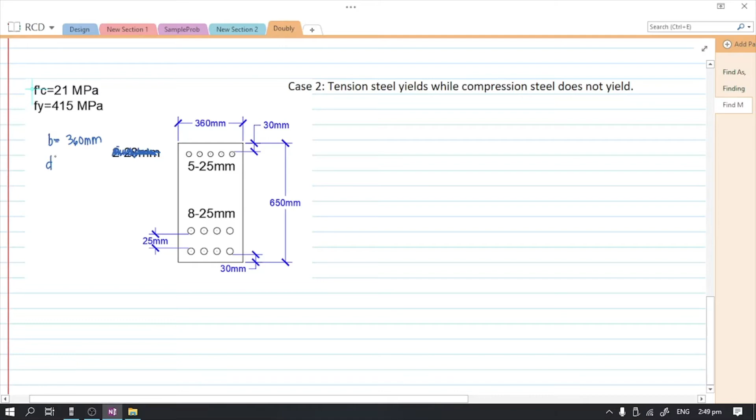Again, ang D prime dapat measured siya from the centroid of the compression steel reinforcement up to the extreme concrete fiber. So dito we have 30 plus kalahati nung bar diameter na 25 mm. So this is equal to 42.5 mm.

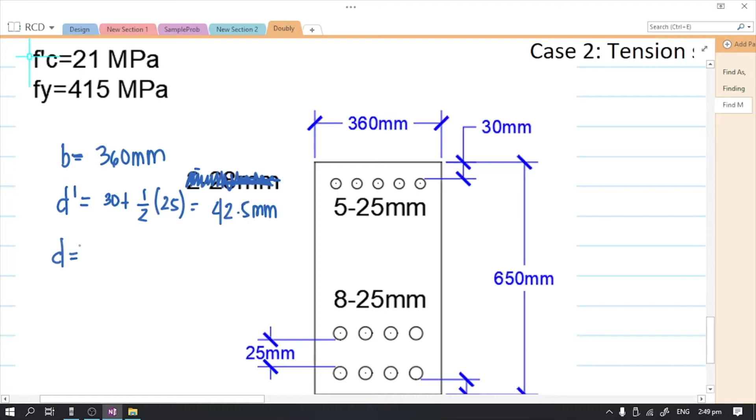And then ano ba yung magiging effective depth natin? So this is a special case kasi nga dalawa yung layer natin. So ang i-assume natin dito, mag-a-act sila as one. Since equal naman yung area sa unang first layer to second layer, so pwede nating i-assume na nasa gitna nila yung kabuang tension force natin.

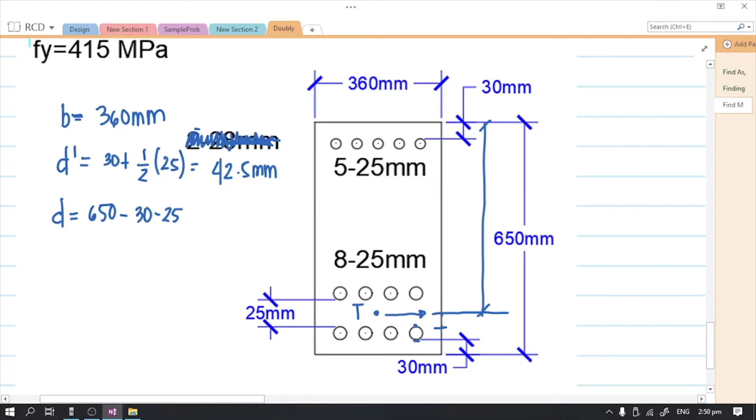So ano ba yung magiging sukat nito? Kung isosolve natin yung effective depth, we have 650 minus 30, minus 25, and paano makarating dun sa up to this one? Kalahati nung ito, 25 mm. So this value is equivalent to 582.5 mm.

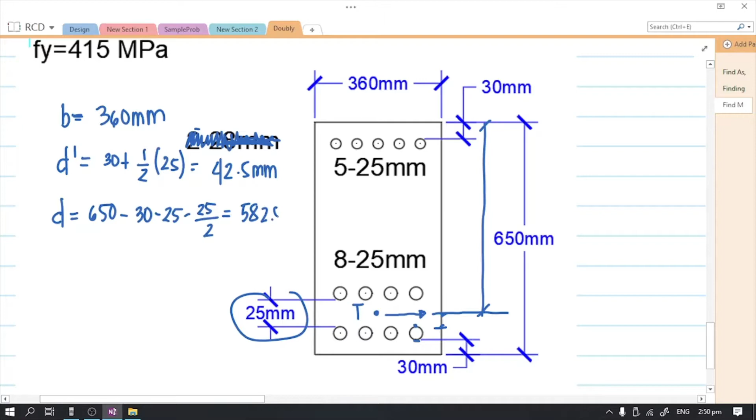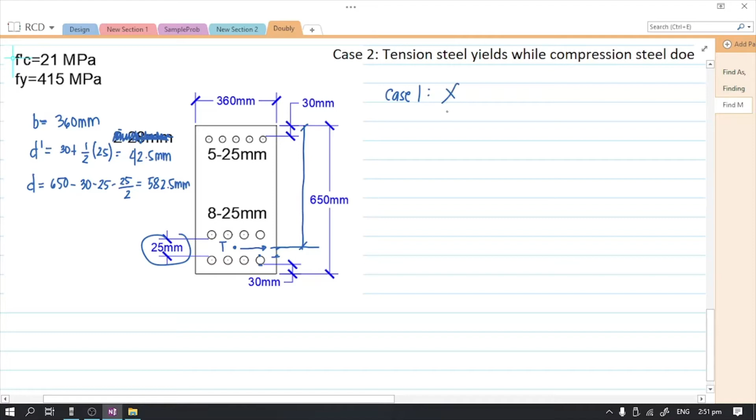So after natin ma-determine yung mga properties niya, yung given, sa normal na solution talaga, dapat ma-prove muna natin na yung case number 1 is hindi na satisfied before tayo magpo-proceed sa case number 2. So ngayon, i-assume lang natin na dumaan na tayo sa case number 1, na hindi niya na-satisfy yun, tapos nagdiretso na tayo dito sa case number 2.

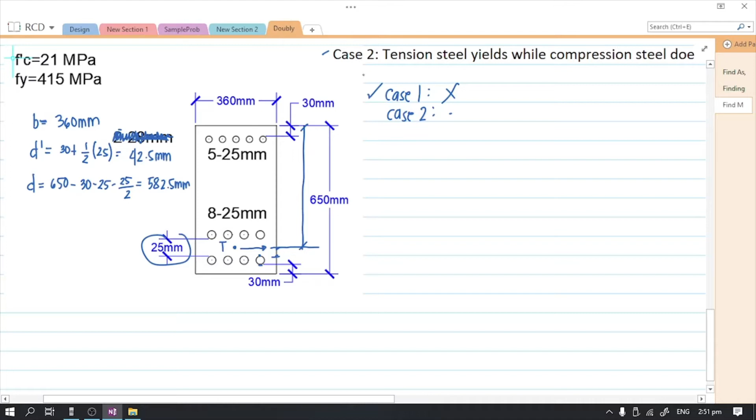So sa case number 2, hindi daw nag-yield si compression steel. So we cannot assume na yung AS2 natin is equivalent to A prime S. So ngayon, ang mangyayari, magsa-summation, ang gagamitin na lang nating equation is summation ng forces horizontal equivalent to 0.

So ano nga ba yung mga existing forces dito? Si kabuang tension or tensile force sa ilalim, and ang katumbas niya is yung compression na kinikerry ni concrete plus yung compression or compressive stress na kinikerry naman ng compression reinforcement natin.

So ano ba yung equivalent nitong tensile force natin? So yung total area ng tension reinforcement, i-multiply natin ng Fy since ina-assume natin na tensile steel yields. So this is equal to, ano ba yung C1 natin?

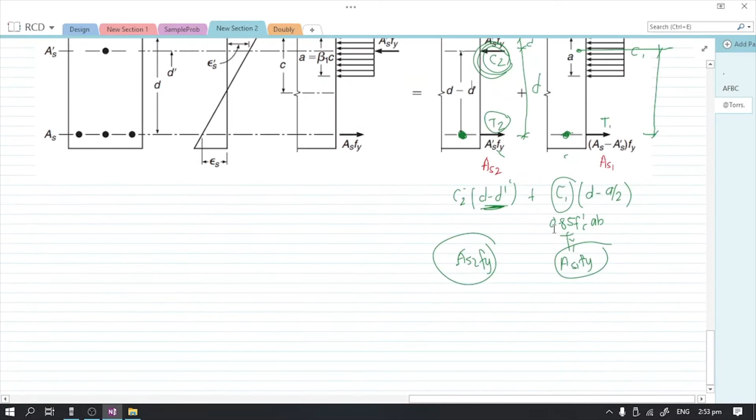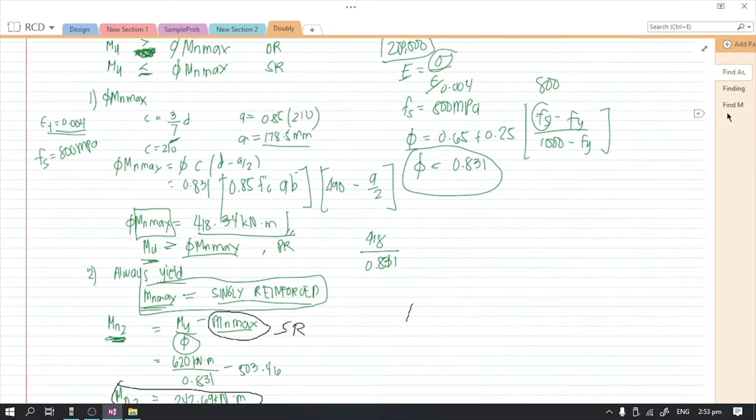So yung C1 natin is ito, yung area or compressive force na kinikerry ni concrete. So, therefore, we have 0.85 F prime C AB, plus ito naman yung compressive force na kinikerry nung compression reinforcement.

And this is equivalent to A prime S multiplied by F prime S. Since hindi nag-yield yung compression reinforcement natin, so F prime S ang gagamitin natin instead of Fy.

So dito sa equation na to, meron tayong dalawang unknown. Pero, di ba, kaya nating i-express si A in terms ni C. And then, yung F prime S natin, meron din siyang relationship kay C, that is C minus D prime over C. So, ayan, i-substitute lang natin.

So, yung AS natin, i-rewrite lang natin yung equation, AS Fy equivalent to 0.85 F prime C. Yung beta 1 natin is 0.85 again kasi less than 28 megapascal naman siya. So, 0.85 C, and then yung B natin plus A prime S, so 600 times C minus D prime over C.

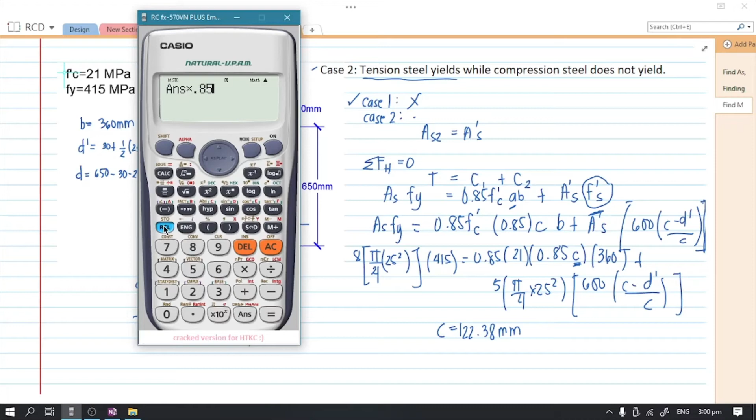So yung A natin, edi i-multiply lang natin to by 0.85 and then store ko kay A. So that is 104.03.

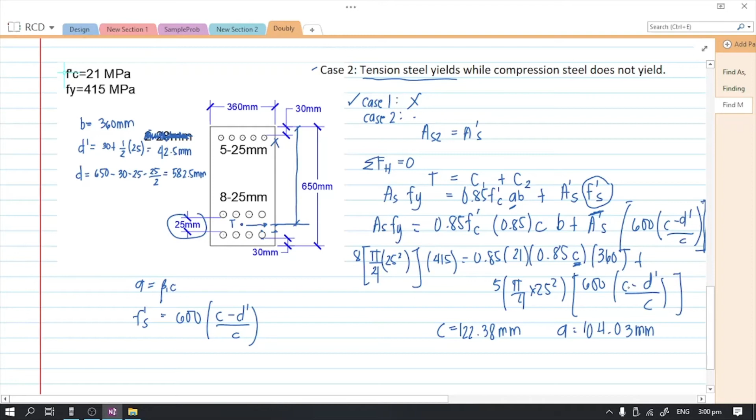Ayan, so after solving for this, now we can verify our assumption. Substitute natin to. So yung f prime s natin is i-equal lang natin to 600 multiplied by c minus yung d natin na 42.5 and then c. So, 391.64.

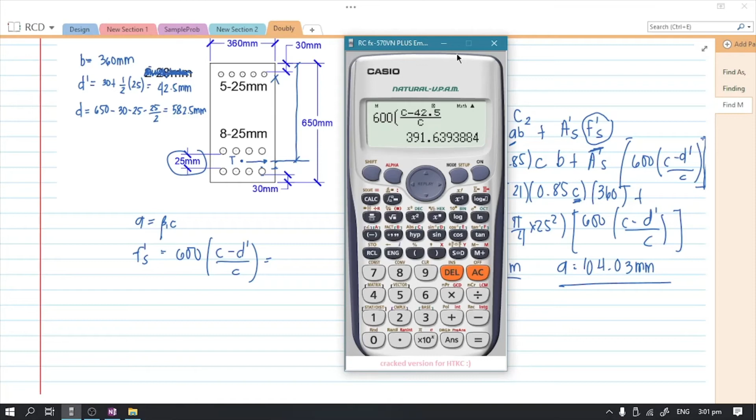Dito, less than Fy siya, no? Yung Fy natin is 415. Therefore hindi nga siya nag-yield. So nasatisfy niya yung condition natin for case number 2. Pero i-verify din natin si tension reinforcement kung siya ba talaga ay nag-yield.

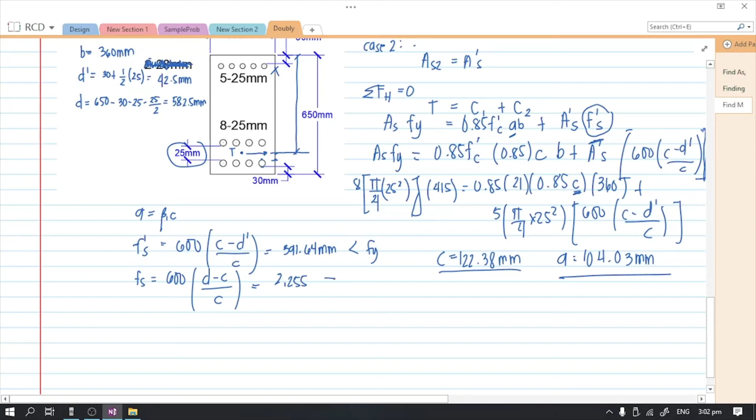So for checking, ang value natin is Fs is equivalent to 600 d minus c over c. So, ito yung value niya, 2,255. So greater than Fy naman siya. Therefore our assumption is correct. So pasok siya sa case number 2.

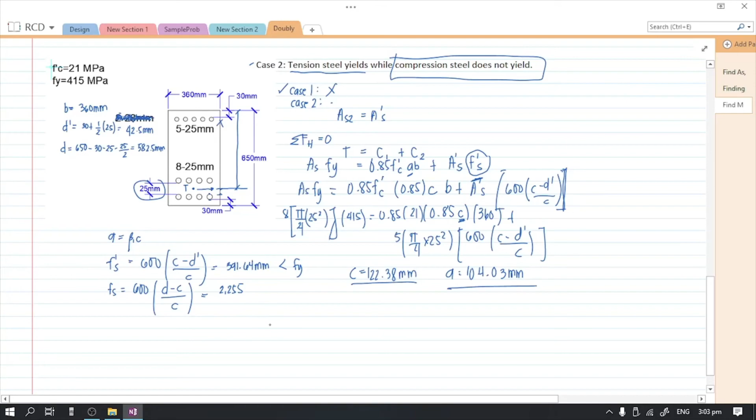So ngayon na-prove natin na siya ay under case number 2. Pwede na tayong mag-proceed sa pag-solve nung MU. So our MU is equivalent to Mn1 plus Mn2. So ano ba yung moment 1?

So first, let us identify the value of phi. Ang magdedepende ulit yung value ni phi kay value ni Fs. So since greater than Fy siya and also 1,000, so our phi is equivalent to 0.9.

So ngayon, ang gagamitin natin para kunin yung moment 1, yung compression. So compression na kinikerry ni concrete. So C1 times D minus A over 2 plus ito naman yung compression 2 times D minus D prime.

Ayan, yung compression, bakit ba hindi na natin ginamit dito si AS1 to si AS2? Since kasi dito si AS1, wala tayo, mahirap pang kunin yung value ng AS1 since si AS2 is hindi siya equivalent to A prime S. So mas madali na ang gamitin lang natin yung available values.

So si C1 kasi, di ba, meron naman na tayong value ng A, kaya pwede na natin gamitin itong 0.85 F prime C times AB and then D minus A over 2 plus yung C2 naman natin na equivalent to A prime S tapos F prime S. Since F prime S ang gagamitin ulit kasi nga less than Fy siya.

Plus yung area nung steel na di ba yung sa compression natin is 525, so 5 pi over 4 times 25 squared times yung F prime s natin na 391.64, times again by D. So yung D natin minus D prime na 42.5.

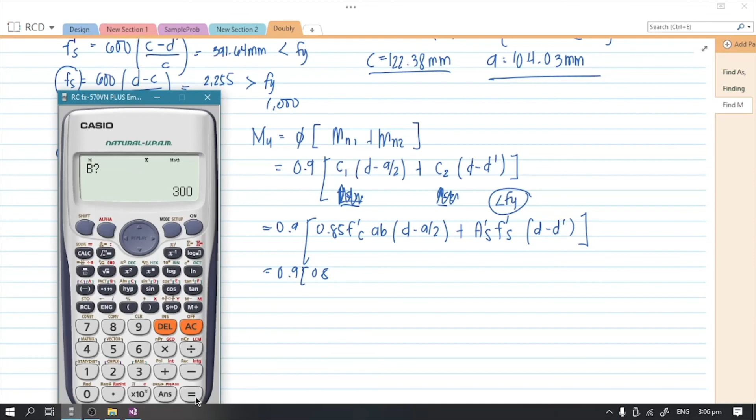So kung nakastore na yung mga values niyo, ang dali-dali na lang yung i-input sa calculator. So meron na tayong value ng A. Yung B natin is, so mali yung naka-store natin, 300. So gawin natin 360. And then yung D natin, tama ba? 582.5. Ayan, ito na ba yung sagot?

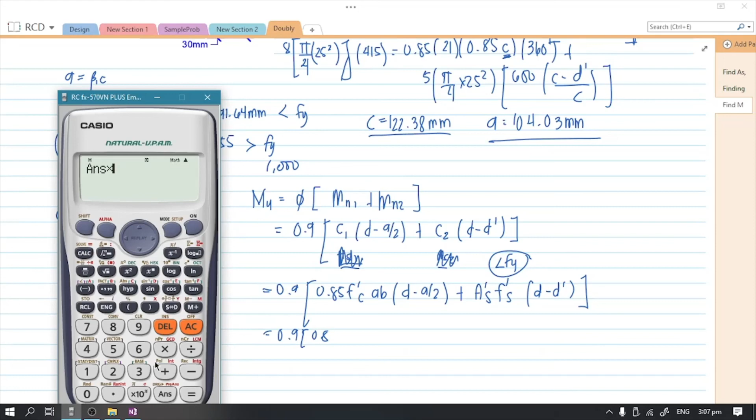So hindi ko pa siya na-multiply ng 0.9. Ayan, so we have 786.31 kilonewton meter. So this is our final answer.

So for the case number 3, on my next video.